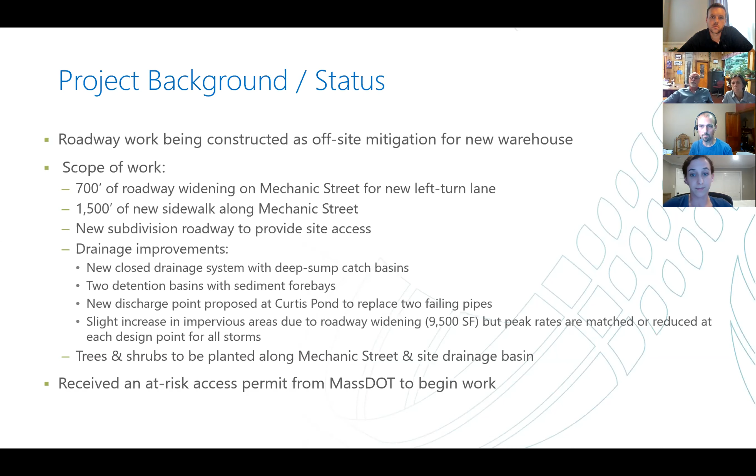And MassDOT did provide us with an at-risk access permit to begin construction. So the contractor is gearing up, but obviously we won't be doing anything within the buffer until we receive an order of conditions.

And at this point, I will bring up a plan view. Feel free to stop me at any point with questions. So this is a general overview of the project. This is the area of Mechanic Street that we're widening due to this left turn lane going into the access road to the warehouse.

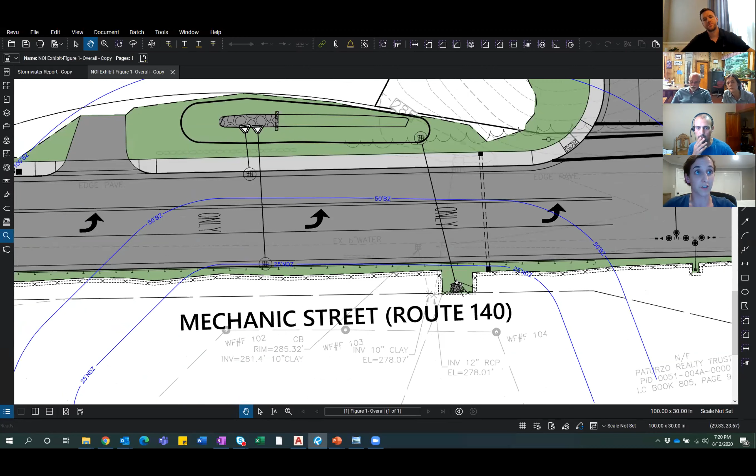The first drainage basin, detention basin that we're proposing is on the northwest corner of the intersection. We are proposing to pipe water from both the northern and southern sides of the roadway into this basin where it goes into the sediment forebay and then stays in here. And then there's another catch basin that goes across the street again to Curtis Pond. This is where we're proposing a new head wall and stone for pipe end.

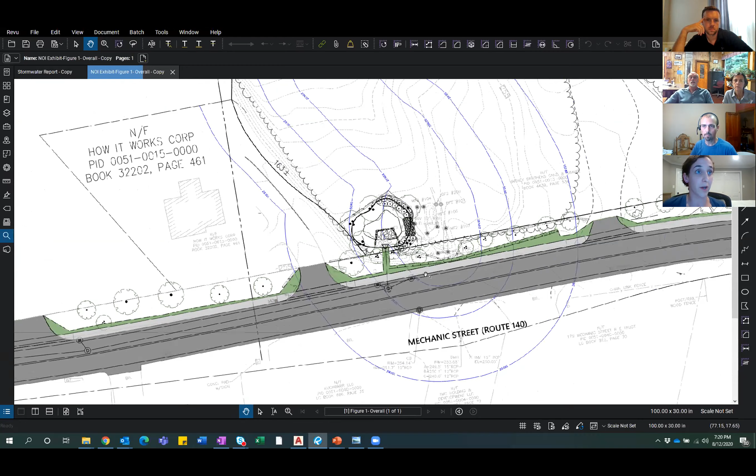And then on the eastern end of the project, well, past the intersection, you can see we're proposing a few new catch basins and a closed drainage system that go to the existing low point on the roadway. And we are proposing this detention basin with another sediment forebay, which then exits into the wetland. And you can see that there are shrubs proposed along the basin as well.

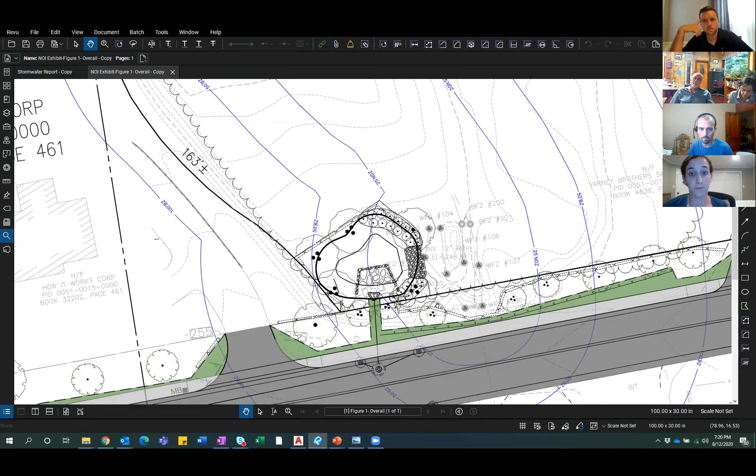I'll note that all of the proposed catch basins are deep sump structures, so we believe the design represents an improvement over the existing conditions, in which the water from the roadway goes largely untreated into the wetlands. And at that point, I will turn it over to Tori to go over our mitigation.

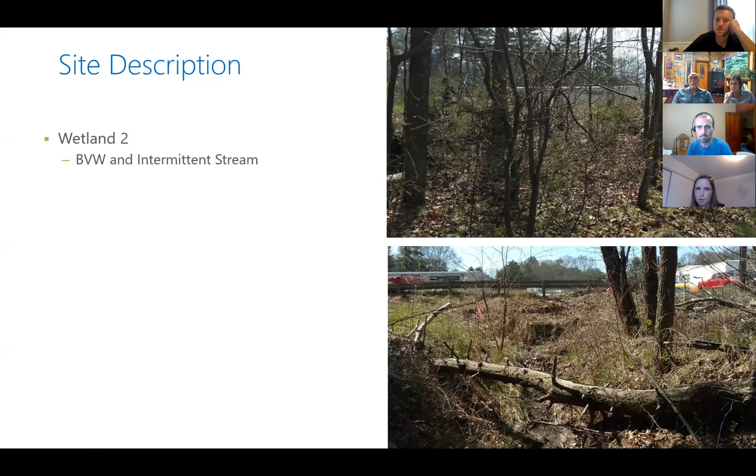I'm gonna go to the next slide. This is wetland 2 over in the eastern portion of the project. That bottom photo is showing the wetland looking towards the road. It's kind of a disturbed area. There's an outfall right there, and the wetland doesn't really start until a little bit lower down. You can kind of see a pink flag. And then the top photo is showing the area where the drainage basin will be. There are a few of the trees that we're going to have to remove as part of this project in that area.

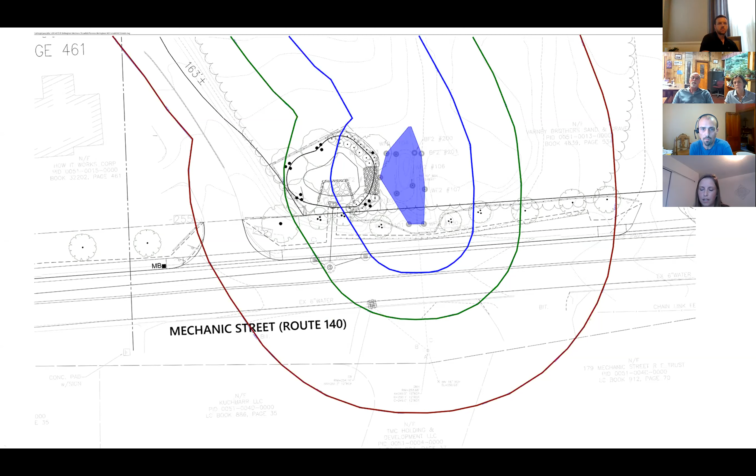Going on to the next one. This is wetland 2 again. Pretty small area in the project vicinity. There is an intermittent stream that starts up towards kind of the northern part, but it's generally BVW. And again, we have the buffers shown. This drainage basin is coming right up against the wetland. We did our best to locate it as far as we could away from it, but just given the constraints of the site, basically we think it's better to treat the water before it's going directly into that wetland, even though we're kind of coming up right against the wetland.

Going on to the next slide. So as part of this NOI, we're removing 25 trees and 105 shrubs. In addition to the typical erosion and sedimentation controls, including catch basin inlet protection for existing catch basins, erosion control barriers, and non-structural practices like sweeping and loam and seeding, we're also proposing buffer zone plantings. So we're proposing 34 new shade trees, 14 ornamental trees, and 110 new shrubs, which we'll replace on a 1-to-1 basis.

And with that, I will open it up to any questions from the commission.

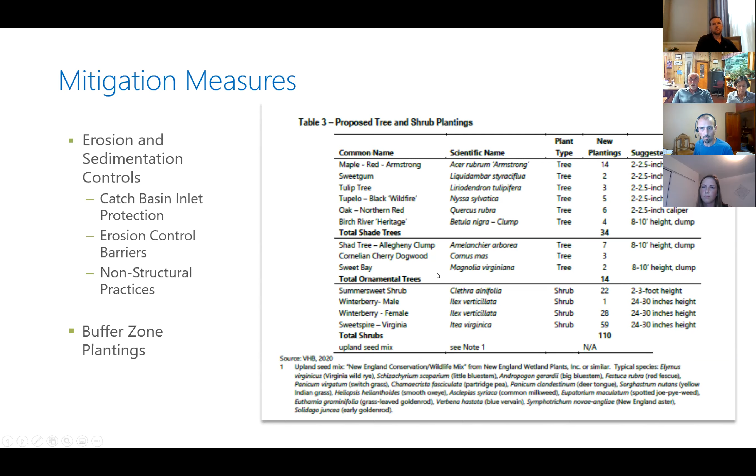Okay, so we have a situation where the drainage system going into Curtis Pond, which was essentially catch basin to a direct discharge, is not properly functioning. It doesn't appear that that's a huge catchment area. Do you know offhand? I guess this is a question for Margot. How big is that catchment area for that? Because it's not a very big structure.

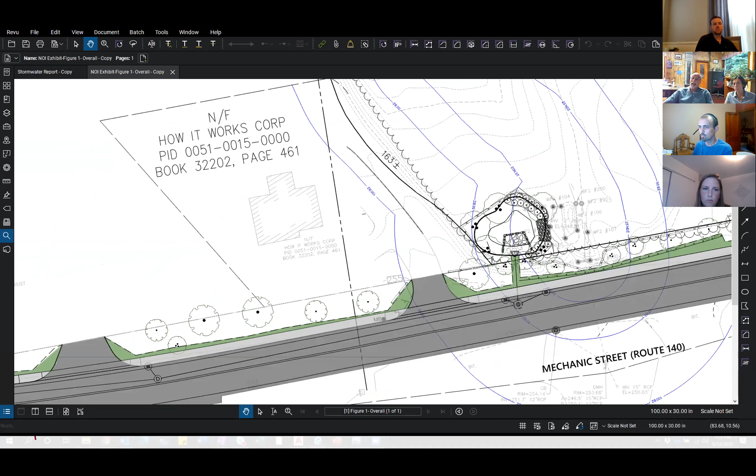Yeah, I know that there's a high point on the roadway a few hundred feet to the west of this, so it was a small area that we're now capturing by these two catch basins. Okay, you don't have that quantified though. I mean, it might be in the drainage calculations. Sure. I can try to dig that up. Okay, if you want to do that, then I can move on to another question.

Sure. Okay, between that and the improvements that you're making to the eastern basin, do you think that this meets the standards for the MS4? Which standards in particular are you concerned about? Well, we know that the town of Bellingham right now, we've had the MS4 audit and we're looking to improve to the maximum, well, actually not the maximum extent practicable. We have standards that we have to adhere to for treatment of stormwater. Has anyone on the VHB design team considered whether or not this meets the standards for the MS4?

Yeah, we've met them to the maximum extent practicable. The only one that is not fully met is the TSS removal, which we met as much as we can, considering we didn't want to have more impacts than necessary. Okay, and I know our DPW director isn't here, so I'm not sure how that would affect our overall evaluation, but everywhere we look, in every development that we're working on, we're trying to meet all of the applicable standards. So, yeah.

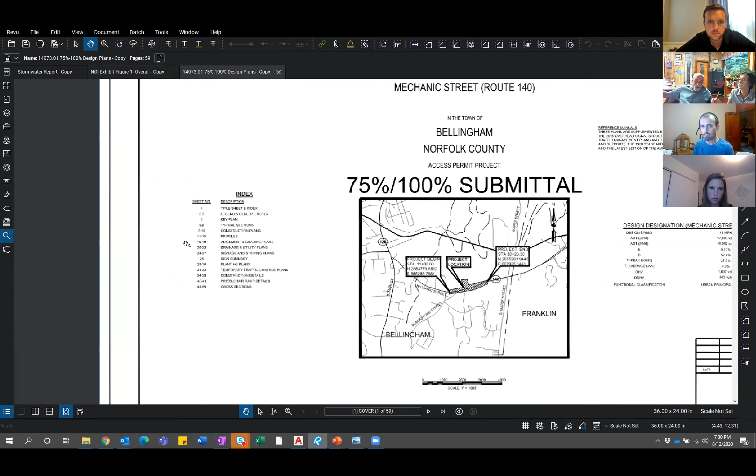Yeah, I don't recall it being 40 inches. That's huge. And it's at the base elevation of the basin. So you're going to be channeling an enormous amount of water into your infiltrators, and we need to make sure the infiltrators can accommodate that volume. Okay. I'm pulling up the plans now so we can check that pipe size. Certainly. Yeah, I have it as 40-foot long, 12-inch.

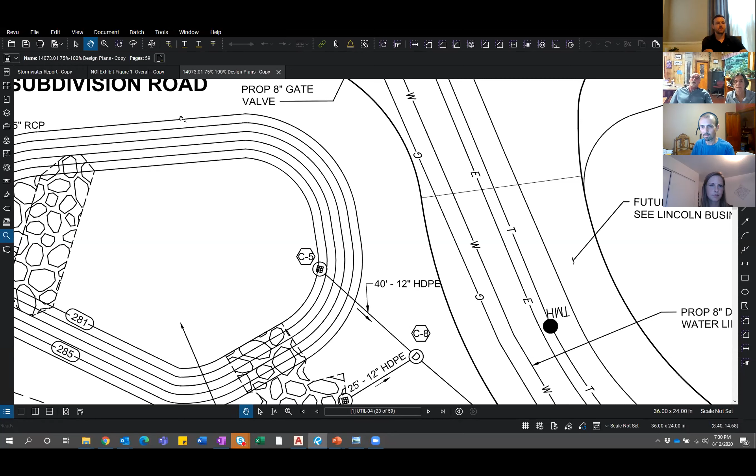I gotta tell you, when I'm reading plans on PDF files on my computer, it's a pain. My mistake. Okay, so it's 12-inch, not 40-inch. Okay, I'm a little bit more consoled. Great. Are you still concerned? I'm concerned because it's at the base elevation. So if you could just check to make sure that that volume was accommodated. Sure. Just answer that question. Absolutely.

Okay, next question is relatively simple. This work may require some excavation. I don't know how much fill is going to be required. Do you have designated stockpile areas?

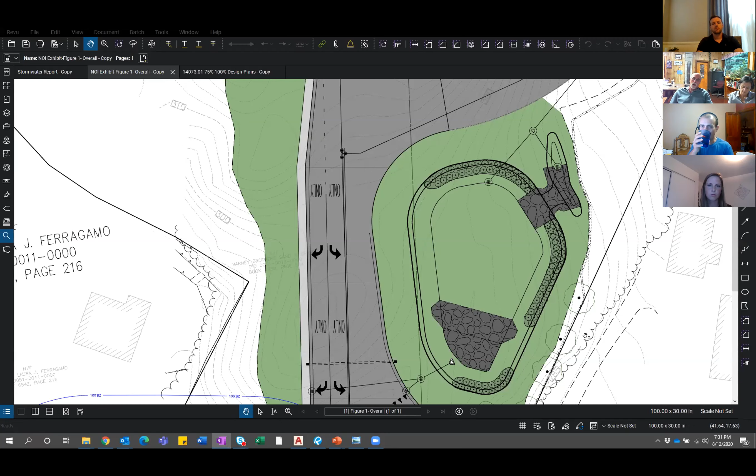Didn't see any on the plans. I imagine you're going to be using something on the Lincoln site if you need it. Yeah, perhaps. John, do you know if there's an area designated on the warehouse site? We certainly did not expect any to be within the state highway layout on Mechanic Street. Okay, well, that'll keep it out of the buffer zone.

Yeah. That's our concern. But what happens is, and I don't know what the stage of construction is now for that basin, but I want to make sure that we don't have a situation where we can have silt entering the basin, because now we have a situation where we have to excavate to approved base levels to make sure that we have the storage capacity that we permitted. Yep, understood. Okay. Let's see.

Question for Tori. Tori, to date, we have not received the DEP file number. And I know everybody's anxious to get this thing moving. Sorry, I'll let you finish. Go ahead. We did receive a file number this afternoon, right under the gun. And there were several comments on it, including on adding this subdivision parcel to the WPA form, which we have addressed, and we can provide you the new form. I can go back and look at what the other comments were, but we did receive a file number today.

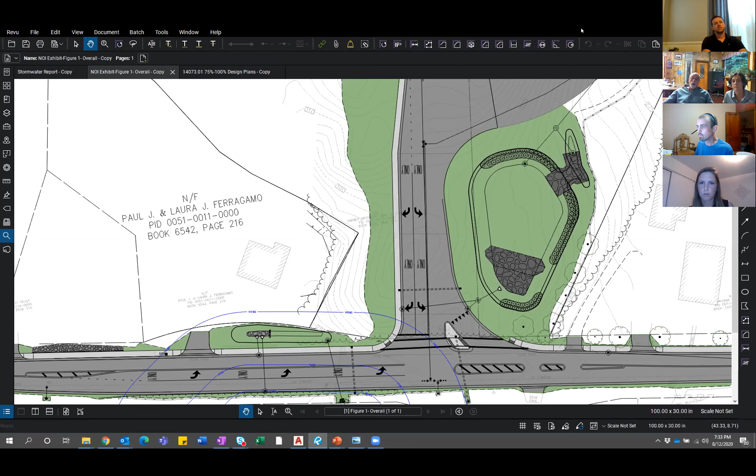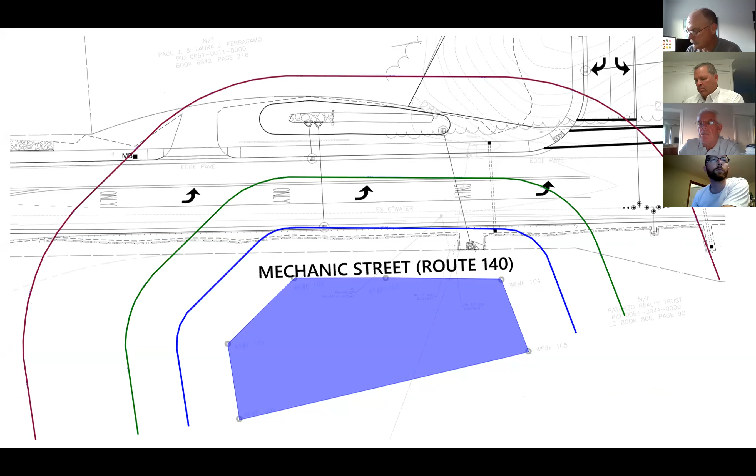Okay. Commission, do we have any questions? I have a couple. That would be Mike. Can you hear me? Yes, I can hear you. Okay, so if you could go back to the plan you just were at with the entrance and the green areas marked. Yep. And could you zoom in a little? There you go, the intersection. Right. Okay, good.

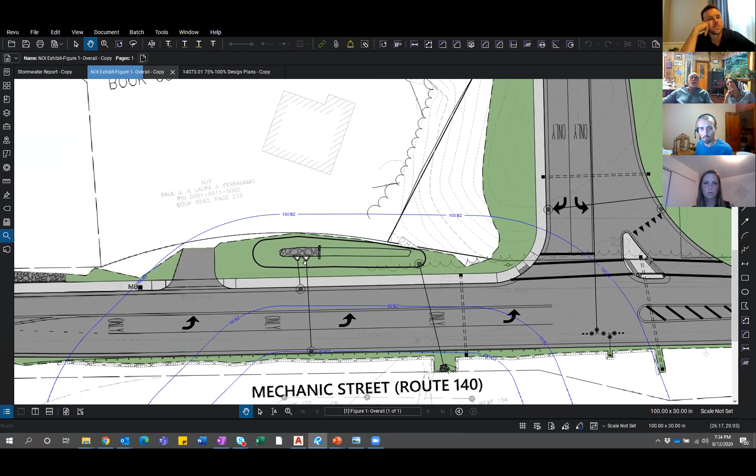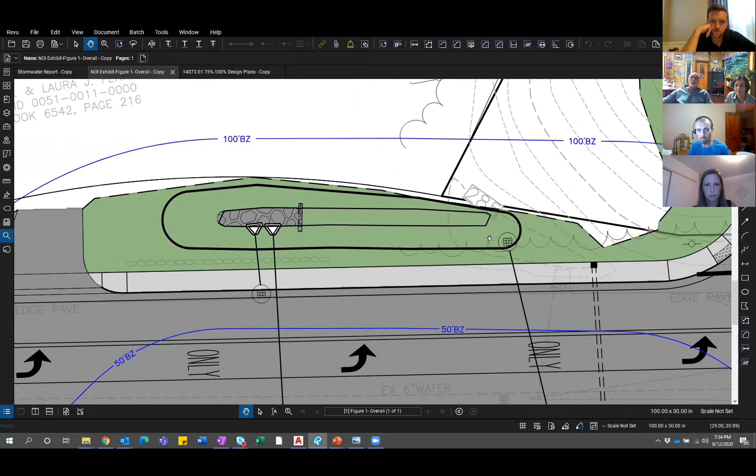So to the left of the entrance to the warehouse, the narrow oval shape, which is going to be a new detention basin, about on the right corner of that basin, there's a small mark. Is that showing an existing drainage catchment structure? Because there is one semi-buried in the ground right now in that area. No, to the left a little bit more. Right where your cursor was. On the left of your cursor, a little more. Yeah, right there. So is that showing an existing structure or a proposed one?

This is a proposed structure. I don't remember there being any existing structure here. What is the black object to your right on the mouse there, right at the edge of the proposed sidewalk? This? Yeah, is that an existing structure? No, we're installing traffic conduit. So there is a small one, small only because I think it's buried under debris, but it's in a very low area just past the entrance of the ramp. I bike by it all the time.

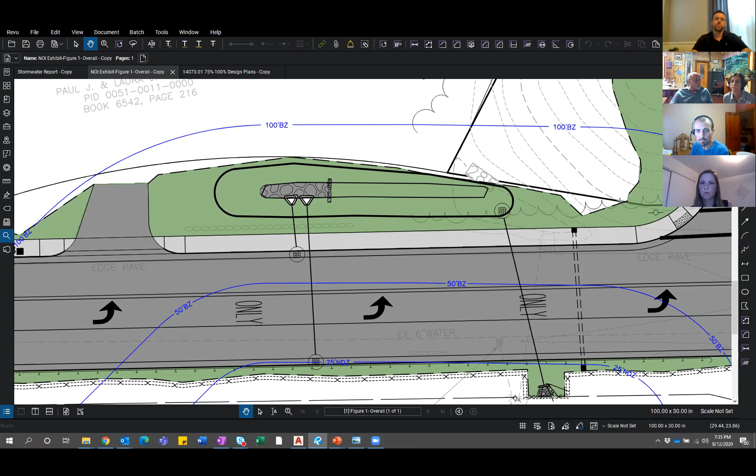I wondered whether that was going to be tied into, and if that was part of the old failing drainage into Curtis Pond. Right. So actually, now that I'm looking, this dashed line here is one of the outfall pipes. And even though it doesn't look like we're showing that structure, the pipe from that structure is one of the pipes that's being removed.

All right. So what is being done to treat this stuff that's going to go from this detention basin that's being created across the street into Curtis Pond? Oils and other runoff, salts and so forth. Yep, so both of these catch basins being proposed in the roadway will be deep sump. So we have some treatment there. Then once we get into the basin, we have this sediment forebay before the water overtops that and goes into the detention basin. All right.

So the elevation of the sidewalk to the bottom of the detention basin is what? So these are, let me see. I think this basin is 2 feet deep, but I can get you the exact grade difference. Okay, maybe I'd address it a little differently. From the sidewalk, if you're standing on this new sidewalk, right where your cursor is, you would be looking over and down into this detention basin, correct? Yeah. You're not changing the topography at all, really?

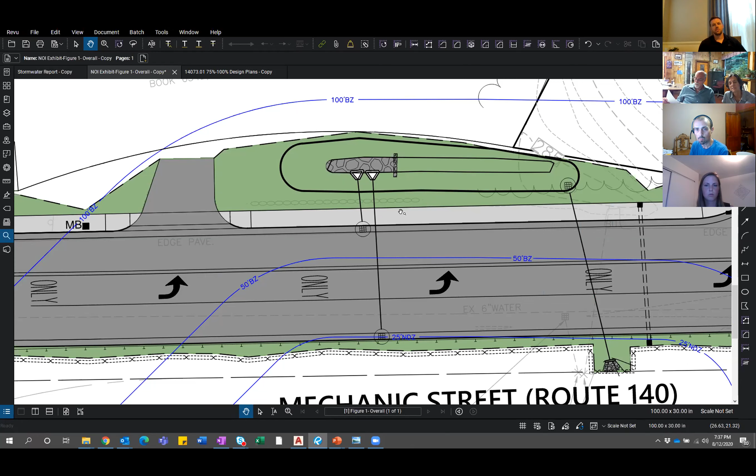Yes, correct. Okay. So what's to keep something from running closer to the entrance of the warehouse into the facility from the street and the sidewalk? Into that end of the basin where it's not going to be treated? Because the outflow is right there, correct? Across to Curtis Pond. Yes. Well, so currently, this will be a deep sump. Okay, I want to make sure that you were down at the other end of the basin. Yeah, any catch basins in the project area will be deep sump.

Okay. The length of the sidewalk at the beginning of the presentation was 1,500 feet of sidewalk. Is that a change from the original proposal for the project? Maybe Jim remembers better, but I thought it was 1,000 feet originally. I was wondering if they extended the sidewalk further down towards Bellingham or towards Franklin in either direction, because it was going to tie in at one end, but not at the other. It's not tying in at both ends, yeah. Sorry. It is, so it's going all the way up to the top of the next rise where the warehouse for the paper company is.

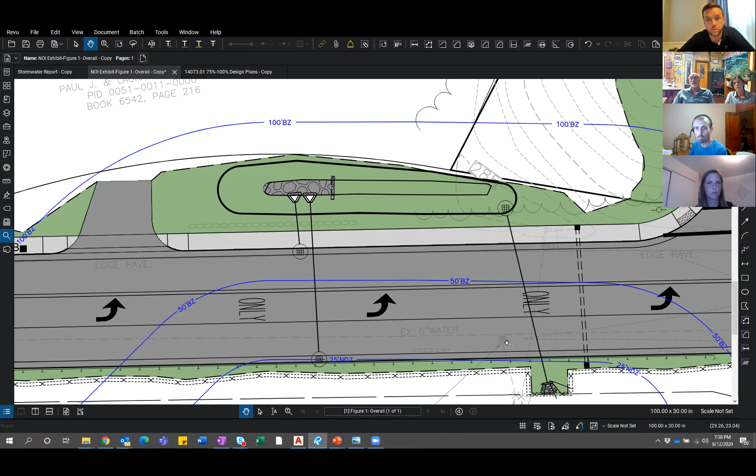So during the planning board process, the requirement was, correct, Mike, 1,000 feet to the Lindenmeyer Paper Company to unite with the existing sidewalk. My understanding, and Margot could talk, and Tori probably could talk more, but DOT is now requiring the extension going the other way. So where we're looking at now on the screen, towards Blackstone Street, to make that connection over there. So it's a really nice extension of sidewalk there. Yeah, that's good. It's tying in both ends.

The widening of the street right there by Curtis Pond, is it being taken from the, I'm gonna say the top, because I think that's northern, actually. I know the road runs east-west right at that spot, because I always bike into the sun at that point in time in the morning. So the top side of the street, is it being taken from that side? It's not going closer towards Curtis Pond in the widening, is it? Because you're right at the edge of the top of the slope there.

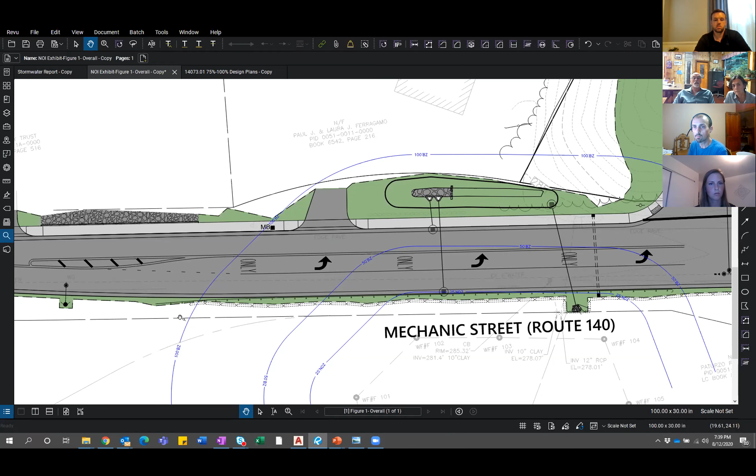Yeah, we are. Currently, we are splitting the difference. We went as far north as we could while keeping the limit of work off of private property. But what we ended up doing to avoid catching that slope down to Curtis Pond is we're proposing a type of guardrail that doesn't require a level landing behind it. So right after the curb, we begin our 2-to-1 slope down to existing ground. Okay, and it's going to be a regular curb to keep overflow from going down into Curtis Pond on that side of the road? 6-inch reveal. 6-inch, okay.

And one thing I wanted to point out, Mike, it's really interesting. We noticed this in the preliminary meeting in March. The layout of the road is really funky. If you look to the north, the black line just under the 100-foot buffer zone line, that's the right of way. Yeah, right there. That's the right of way. So we had the same concerns, but they expanded in the existing right of way without having to take private property. For the life of me, I don't understand why the right of way was expanded at that point, but there it is. That's the layout.

Uh-huh. So I'm just still trying to picture the eastbound side of the road there. So the existing guardrail has a little bit of level, like a few inches beyond the actual edge of the metal before it drops off. You're saying you're putting a different type of guardrail that basically doesn't need that. It sort of attaches to the curbing. The posts go much deeper, so the level area behind them isn't required to prevent the post from failing if a vehicle hits it.

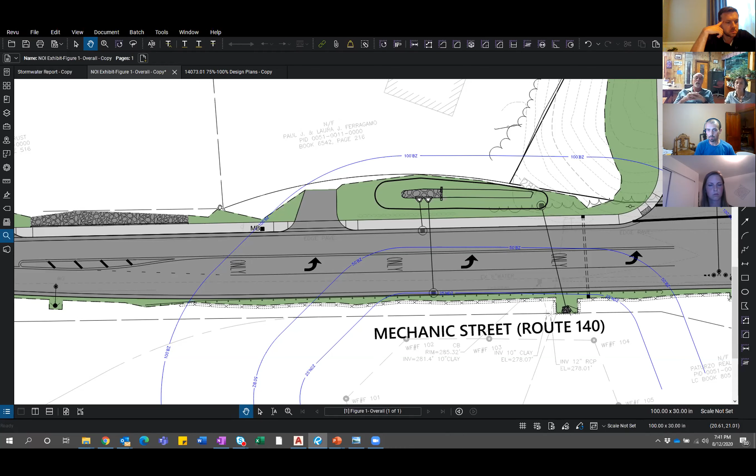So right at the, yeah. Go ahead. Good. Yeah. So what keeps the slope from eroding on the back side of the new curbing when you're now going right up to the very, very edge to, as you said, split the difference? I mean, we're using a 2-to-1 slope, which we always consider to be stable and non-erosive.

You're going to have to grade along the edge of that though, correct? You're going to disturb the area right at the top of the slope to do the railings and put the new posts in and everything else. My point is, what's to keep basically everything from sliding down into there? Are you putting stabilization materials on top of this afterwards? Because it doesn't seem like you have the room.

The existing slope you're concerned about? Yeah. So you're going to work on the top of the existing slope to do the new guardrails, to put the curbing in, et cetera. My concern is protecting Curtis Pond during the construction, and then what will stabilize the top of that very steep slope that has almost no lip now before it drops off to even less lip in the future, so that whatever hits that side of the top of the slope doesn't land in the road and get kept in by the curbing, but in fact is on the outside of the curbing.

Well, our intention is certainly for the contractor to not go beyond our erosion control. And I can show you some example cross sections. So we're actually able to tie in within the shelf next to the roadway, and we're not tying into the steep slope. So we did not believe that the contractor, aside from the new outfall, which will be stabilized, will be disturbing it.

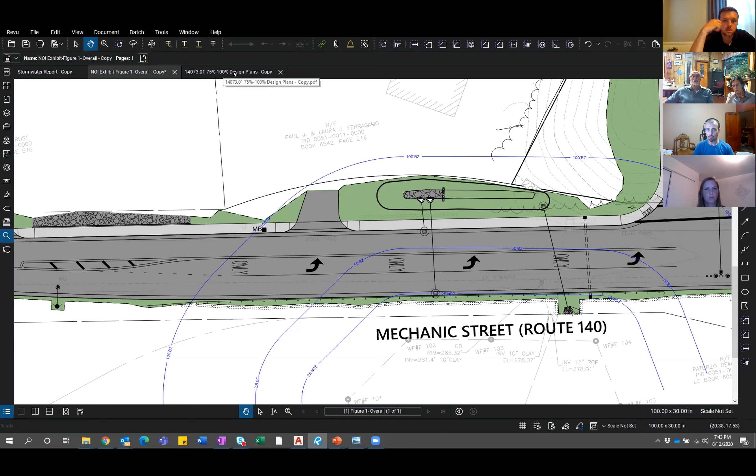Okay. How much was the road widened in that section compared to what the exact width is now? I think it's 22 feet now or something like that I saw. Yeah. I'm going to pull up the plan so we can get a better idea. We have to move along. I have one more question after this.

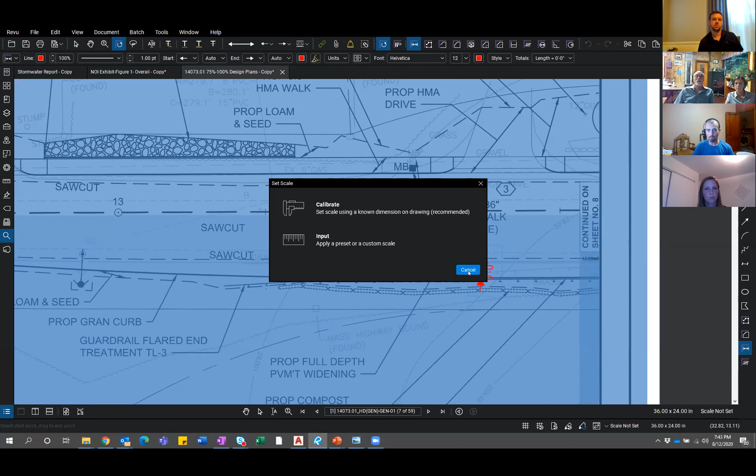Let me see. So that's 20 feet. It looks like it's a little bit more than 5 feet. On one lane or 5 feet overall? In both directions. You need 5 feet on each side of the middle of the road. So 10 feet, 10 and a half feet total? Yep. Okay. I mean, we're adding another travel lane, so. Yeah.

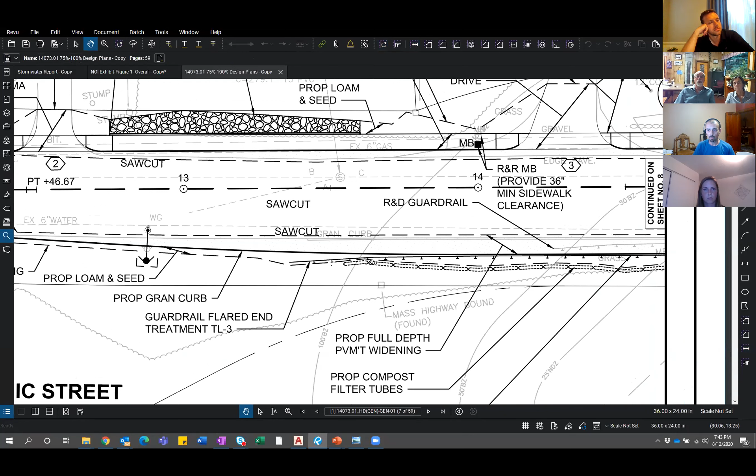Okay. One last question. I know we're going to move along. The entrance, the detention basin, detention, not infiltration basin, correct? The right of the entrance, that's not looking for any infiltration, correct? Because it looks like they blasted into a bowl of stone as I go by it. I haven't gone down and walked around in it, but not that one, the other one to the right. This. Yeah, that area there is all stone right now. And again, I haven't walked around.

You're not proposing any infiltration through that. I raised that during our initial hearing. It looked like they're going to blast down into the stone. I said, well, how are you going to be sure you're going to be able to infiltrate anything? I thought they were talking about taking infiltration in that area. Is that still proposed? No, we're not counting infiltration in this basin. And we certainly have gotten the feedback from the contractors on site that it is all ledge. And we've tailored the plantings around it with that in mind.

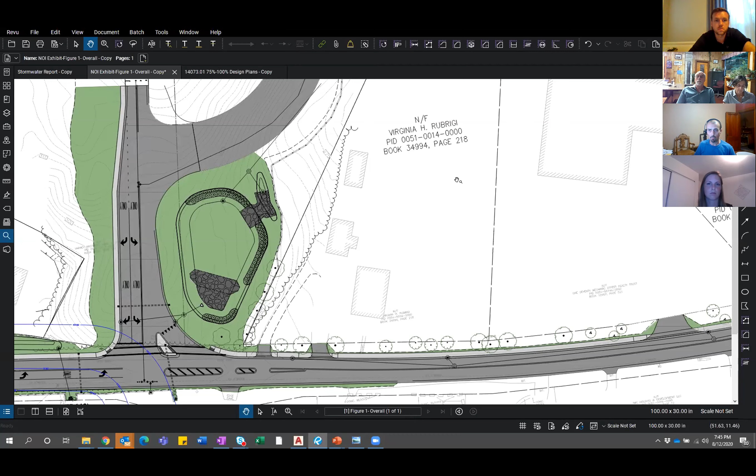Okay, so yeah, that area there is all just flattened, and I think Jim mentioned this at the last meeting, that's not part of the Lincoln project? That's some other project? That's correct. Okay, all right, because I was going to make sure of what we're planning on doing. So landscaping isn't going to go over into that area at all? Correct. Okay, all right, that answers my questions, thank you.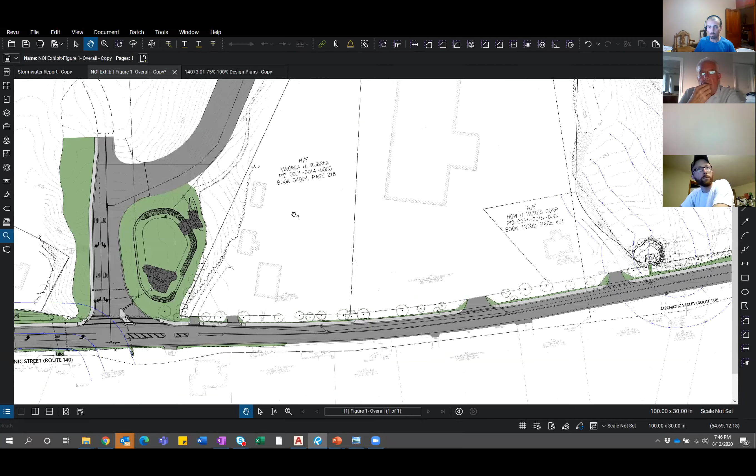Mr. Chairman, I'd like to ask a question about the other basin. Certainly. Could we move up to the other basin? The one to the east. There you go. Thank you. I just have a question about the siting on that. Why it couldn't have been located a little bit further from the wetland, possibly elongated to the northwest a little bit.

Yeah, I can take a crack at that. The real reason that we did that is because siting it where it is located on the plans has sort of the least impact to the existing vegetation that's there. We did look around at alternative sites. We actually looked to the east of the wetland, basically on the other side of the wetland. We looked at expanding to the northwest, and the area where we are locating it now really has the minimum disturbance to the existing trees and other vegetation. It's pretty sparsely vegetated in that spot. But if you move it in any direction, you end up impacting more vegetation. So it ended up being the most.

And we thought also, I know this commission doesn't like to use the word degraded for wetlands, but the wetland that it is adjacent to is a compromised wetland. It's got a lot of scour. It doesn't really have a lot of size to it or other wildlife habitat values. So we wanted to get something that was going to expand that area as a naturalized area and make it a little bit larger and more comprehensive. So it seemed to actually serve a little bit of a dual purpose there.

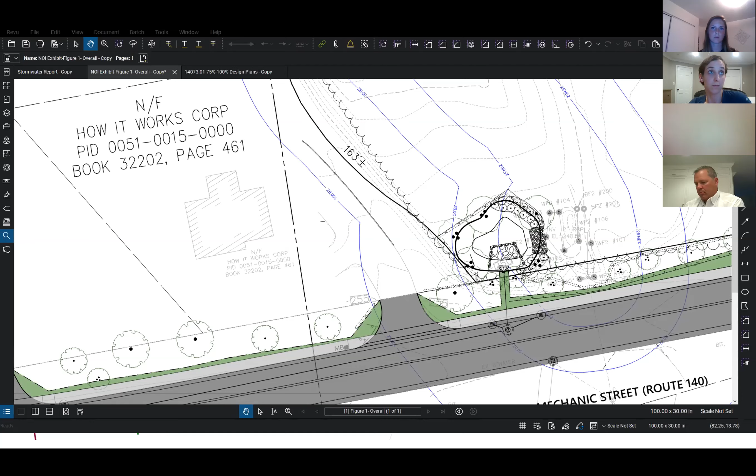With all that said, and all the great things that have happened on this project to date, my question is, would we be held up from actually going out there and starting to mobilize and do some construction over the next couple weeks before we finish up on the 26th? I think Margot had suggested something earlier in the hearing process. Now, remember, we had a motion and a second. This is part of discussion, so I'll allow it. What Margot was talking about was work that's outside the buffer zone. I think that's not regulated, so that's permissible.

What's the board thinking here? Yeah, I'm sorry that I didn't get in there. I was raising my hand a couple times, but I guess it wasn't working correctly, and then I finally got in. I was trying to make a comment earlier.

Okay. Well, again, I don't feel that having the order prepared for possible approval and signature at the next meeting will delay this at all, not one minute. That's kind of the standard that we follow, regardless. The time frame for doing it this way or the other way is exactly the same. Correct, Mr. Chairman? I think the applicant's suggesting that they're ready to mobilize shortly. No, I get that, but we couldn't possibly have the order signed before the next meeting anyway.

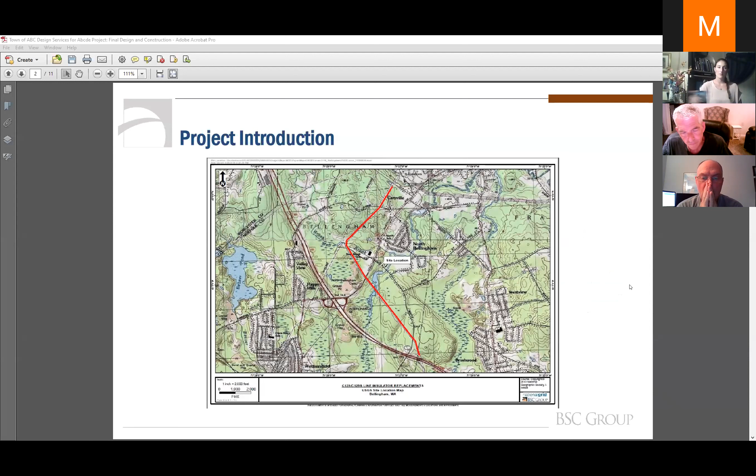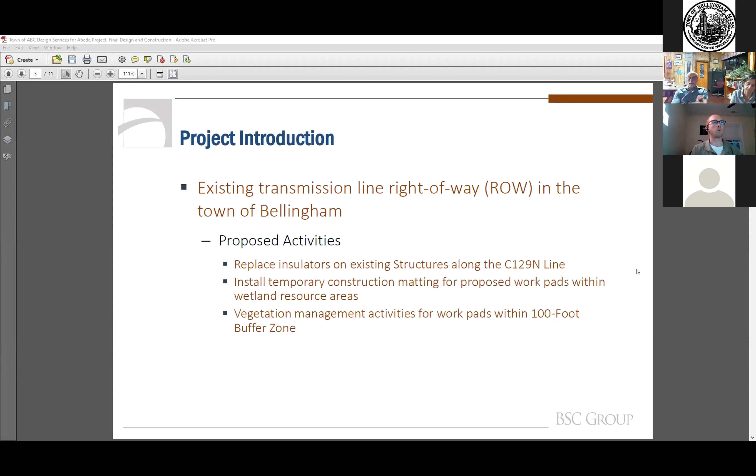So as I said, New England Power is proposing to do an insulator replacement project on the existing C129N line. In terms of location, exactly right. We're going to go from Maple Street to Stone Street in Bellingham. Here's the USGS map as reference. In terms of project introduction and scope of work, within the proposed activities, the replaced structures will be on the existing structural transmission line of the C129N line, install temporary construction matting for proposed work pads within wetland resource areas, and then also vegetation management activities within the 100-foot buffer zone.

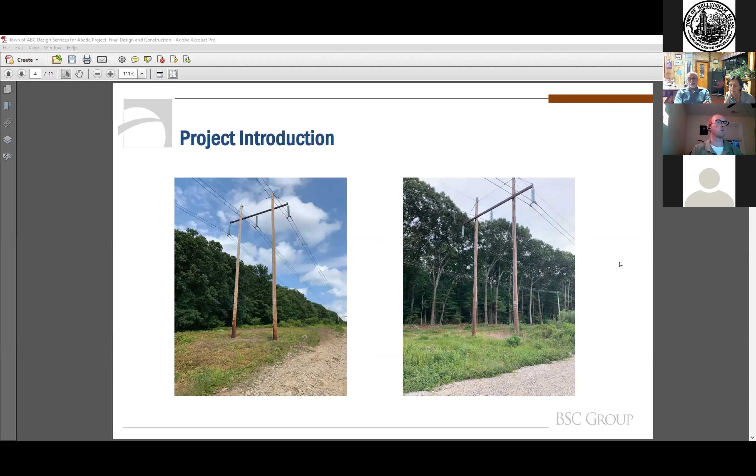Here's some pictures of areas where they have done some work previously in other towns. To the left here, we show a small mowed pad within a buffer zone. The insulator replacement overhead work is shown up here. They're basically just going in, replacing these insulators. It takes about 2 to 4 hours per structure, and then they move on to the next. And then here's one that's also been completed. Very minimal ground disturbance in areas of buffer zone and upland work. The areas where the structures do exist in wetlands, that's where we propose the matting, which I can go into shortly here.

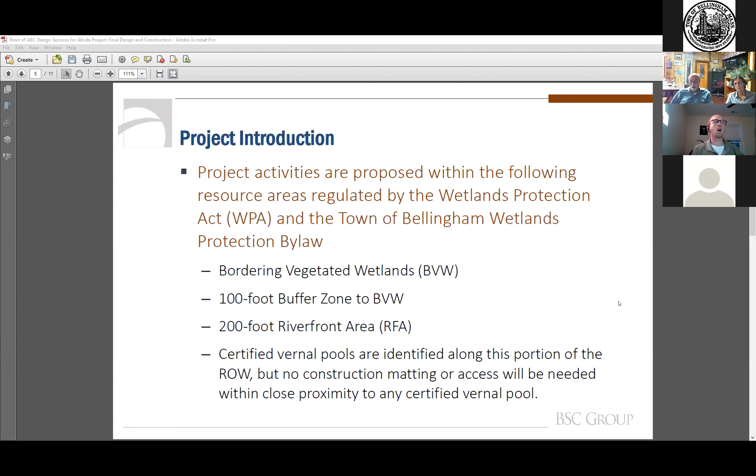So as I said, project activities are proposed within the following resource areas of the Wetlands Protection Act and the Town of Bellingham Wetlands Protection Bylaw. The resources are the bordering vegetated wetland and the 100-foot buffer zone. We have a small section of 200-foot riverfront area. There are some certified vernal pools identified in this portion of the transmission line, although no work is proposed within or close proximity of these. All the access roads have been approved for a previous project that still has an open order of conditions, and all those will be used for this project.

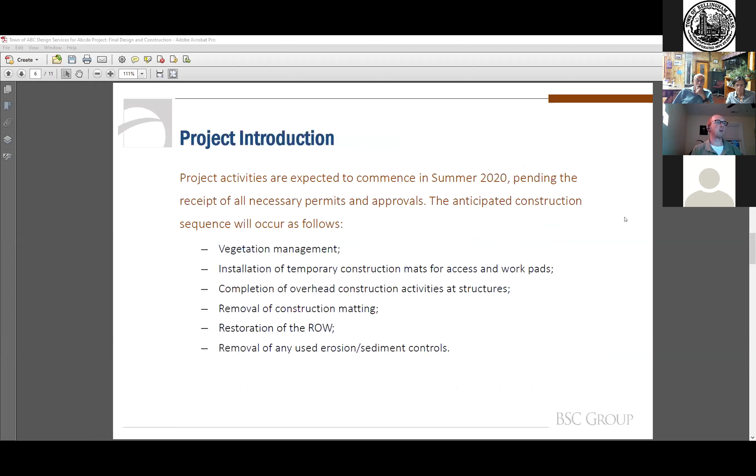They would like to start within a couple weeks here, so summer of 2020. Basically, they're going to do some vegetation management in the 100-foot buffer zone areas, install the construction mats for the access and work pads, complete the overhead construction, remove the matting, and then do any restoration or removal of any erosion controls that are needed. This is overhead maintenance work, which is exempt under the Wetlands Protection Act. However, we are filing this RDA for the matting within the wetland resource areas per the town wetland protection bylaw.

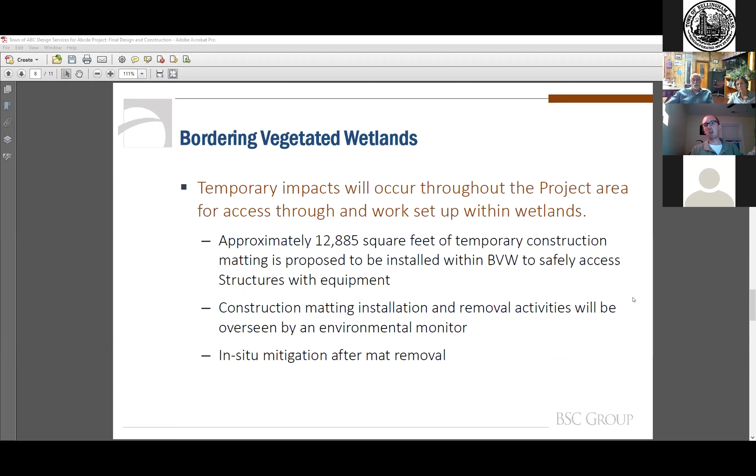In terms of temporary impacts, throughout the project we have approximately 12,885 square feet of temporary construction matting proposed within BVW. I had briefly coordinated with Ann already about installing and removing these construction mats with an on-site environmental monitor, and then in-situ mitigation after mat removal. This work is under the ACO, and per the ACO through DEP, we will be monitoring the restoration and vegetation regrowth after the matting is removed.

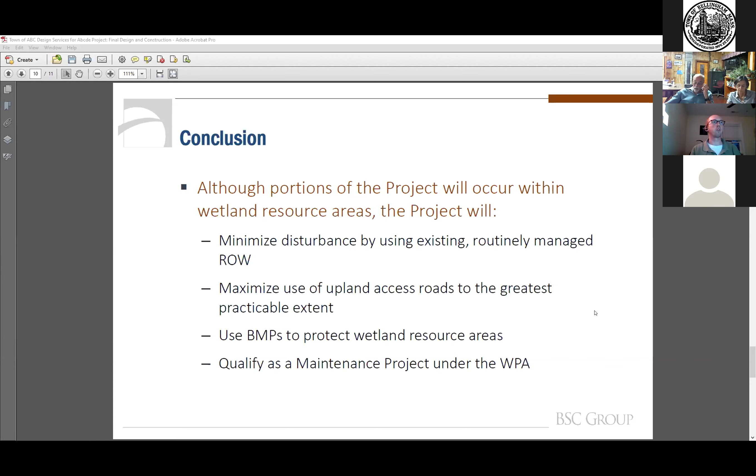And then some best management practices: sediment and erosion controls, stabilization, construction accesses, and work paths. Any refueling and maintenance will be conducted outside any resource areas. Mowing and invasive species management, making sure that invasive species are not spreading, and also the construction matting. So in conclusion, we have very minimal disturbance anticipated for this project. The access routes will maximize upland and existing access routes. The use of BMPs, and again, this qualifies as just an overhead maintenance project. No ground disturbance for this work. I'm happy to answer any questions. I can also go through the plans if that would help.

Real quick, what time of year were you proposing to do this work? So it's going to be this summer. It's probably going to be as soon as we have the RDA, the negative determination. If that goes through, then within probably the next couple weeks. That's high summer. I don't suppose there's any way we could delay a little bit until such time as we didn't have full leaf out. It's dry though. It's dry. Yeah, it is dry, and I know for some of this work they will need outages, so that will also determine the schedule a little bit as well. Well, it's not like we need power at this time of year.

I mean, summer of 2020, you realize summer's almost over, right? Yeah, so like I said, it's gonna be within a couple weeks. Okay. Seems kind of last minute. Well, I guess some work has taken place.

I guess the question, I mean, it's a rhetorical question, but you know, when you're replacing structures, wouldn't you be doing the maintenance to the insulators at the same time? Just seems a little duplicitous. We have a different union. Oh, okay.

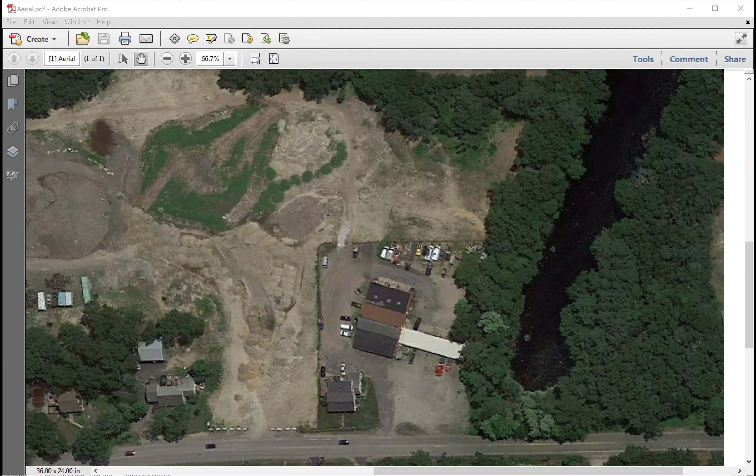Ouch. Point for Jim. Boy, I like Jim. He tells it how it is. That's it.

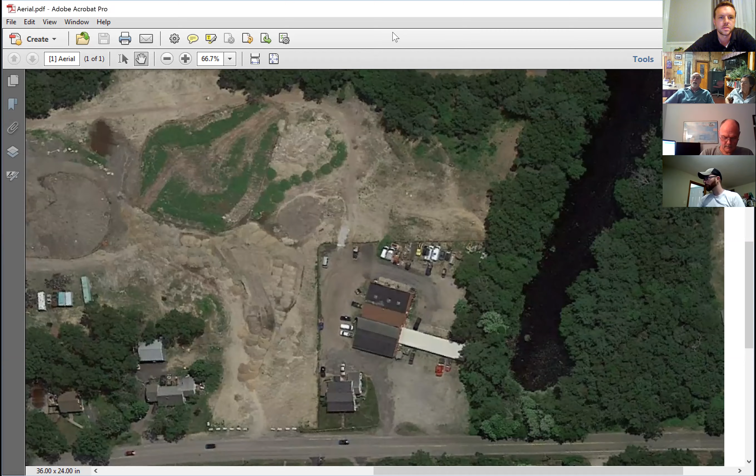All right, let me go back to the Zoom. So you're still looking at this. Do I? We have the orthophotography. Yeah, I'm trying to see how I would pick another PDF. I apologize for that. Is it open already on your screen? It is, yeah. That's why I just went in and tried to select it. Well, you might need to unshare and then open it back up, share again. It'll give you a full array perhaps. All right, why don't I do that?

That's why my wife calls me Mr. Pencil. I'm not good with this type of stuff here. I didn't get a cell phone until about 5 years ago.

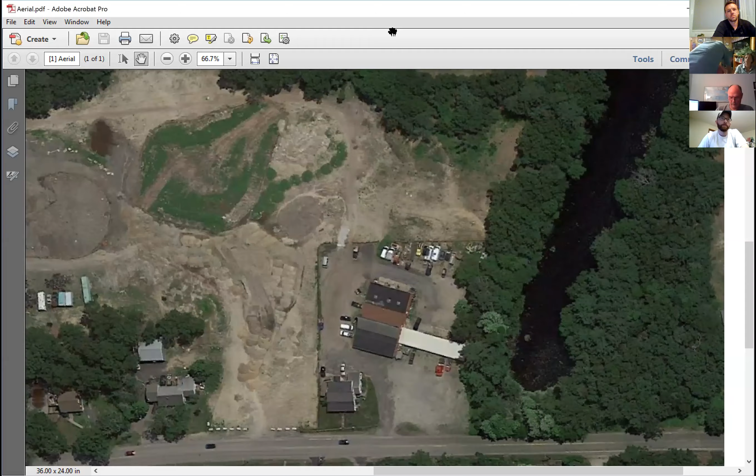All right, I'm gonna do this again. Sure. Why don't we do, all right, yeah, that'll work better. How's that? Oh, much better. Much better. Okay, thank you. Thank you for bearing with me.

So we are across the street coming in. I've got a hard turn for our site to come in because we are sensitive to the wetland resource area with Curtis Pond here on the side. So as part of our design, we had to do a very dramatic turn, but still staying with standard design guidelines to come into the site and minimize our disturbance, even within prior disturbed areas, to try to really mitigate that. But then we do come back towards the 100-foot buffer in this area where we have some parking, covered parking garages, and some parking spaces right here as well.

We are going to be modifying this slightly to let you know. So we did go through a ZBA hearing, actually 2 of them, and had several meetings with abutters where there was concern about how close we were in proximity to them. It's going to require us to push this covered parking down a little bit and get rid of these 3 parking spaces. So that will push us into the buffer a little bit more with that covered parking. However, we're basically swapping out impervious area for parking with a covered structure, which is better from a stormwater control standpoint. So I'm gonna do this the way we just did it last time.

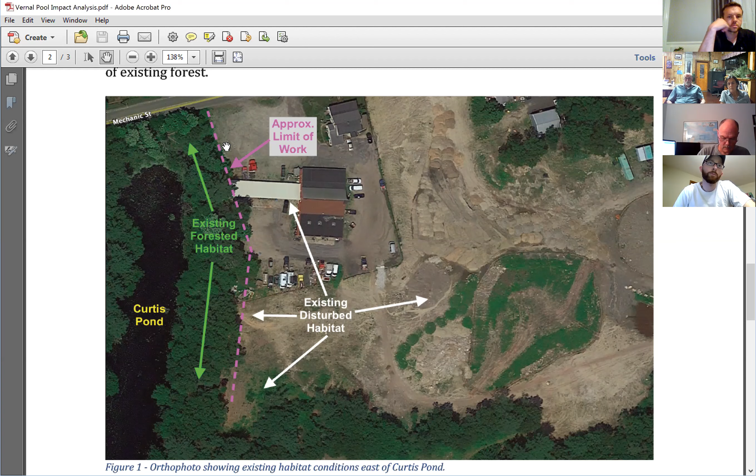What we did want to make sure that we highlighted, it was stated by both that existing forested habitat was valuable, especially for the spring peepers, to maintain it as much as possible. So that's where we held the limit of work. We're not going beyond that. We do have to go into the 25-foot buffer slightly near the entrance for that access in. However, that is not an existing forested area. It's just an existing disturbed area that happens to be within the 25-foot no disturb. And then we'll certainly restore that back. So I did want to just show you that again.

And then I think it's worth showing you a big component that we worked hard on, the stormwater design. This has got a lot of colors to it, but what I want to show you is if you can follow the pink outline, this is the subcatchment area, P4.0. This is the area that contributes towards Curtis Pond. Everything else, we were careful to design the grading and the drainage in such a way that everything is now traveling away from Curtis Pond.

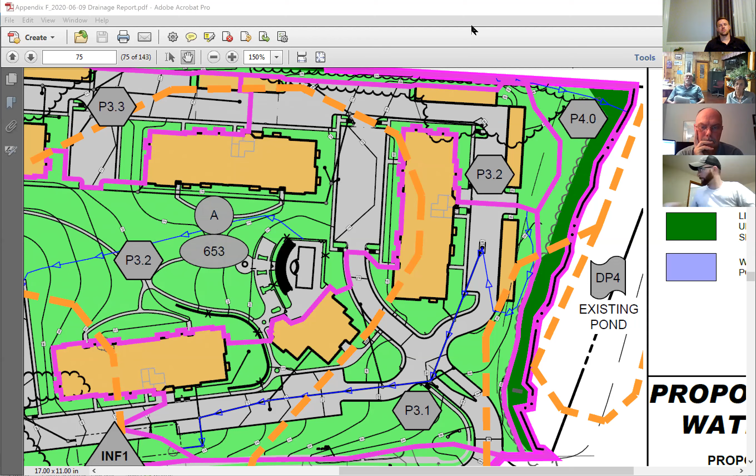So all the impervious surface that's within the 100-foot buffer zone is actually directed away from Curtis Pond and goes into our stormwater mitigation that is easterly away from that. So the only subcatchment contributing to Curtis Pond after the project will be a restored area that will have vegetation throughout. We'll have the existing forested area and then a restored area up in this region. So we think that was important just to give you an idea of the improvement that we're going to make to the stormwater flow towards Curtis Pond.

We are proposing 15 trees within the buffer zone, a mix of oaks and ornamentals. And we do have obviously revegetation that's going to be going on, especially up in this region, all through here, that's going to be untouched. And that's most of the highlights of it.

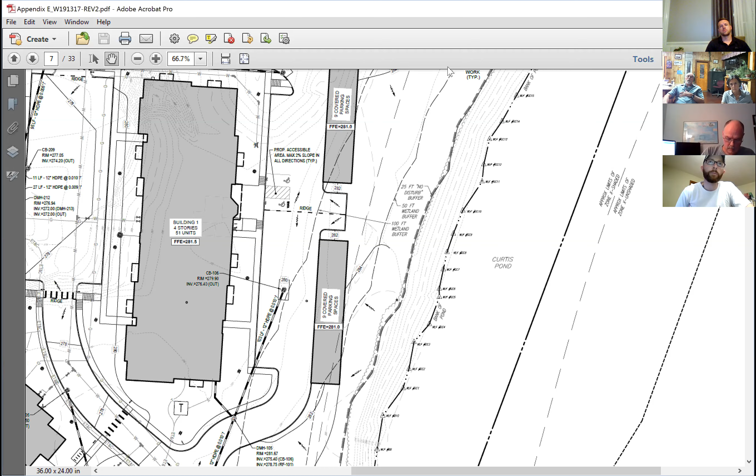I do want to point out, we do have a small area that is impervious right here within the 0 to 50 foot. It's about 70, 75 square feet, but it's covered roof area that's directed away. And the existing impervious area within the 50-foot buffer is approximately 700 square feet. So a significant improvement in that regard as well. And I can put up anything else you guys might want to review that I've shown you so far. So the existing structures are going to be removed.

I think what we need to do is we need to take a walk. I'd like the commission to see this. We'll pay special attention to the break point in the edge of the forested area. I'd like to also point out that in the BSC peer review, they noted that with the presence of the facultative species that were discovered in their site inspection, they felt that it might be certifiable if Curtis Pond dries up. Now, I've witnessed Curtis Pond dry up numerous times over the years.

What we normally do, just so that we can highlight resource areas, is that we request applicants, if it's appropriate, to go through the certification process for us. Is it something you might be willing to do? It's not going to affect your project because, as you probably are aware, under state certification, there is no extended buffer zone. It's just to the edge of the resource area, but we like to have accurate mapping of those resource areas in our town.

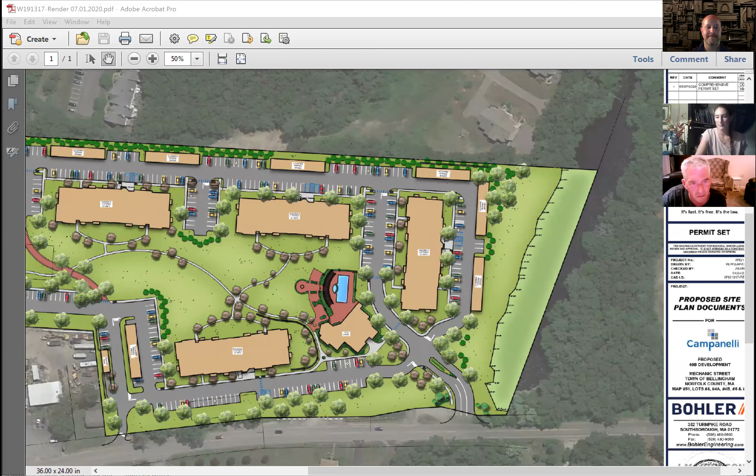Thank you. All right. Thank you very much. And thanks for having patience with me. I appreciate that. Well, thanks for your forbearance because we're a little behind schedule, but we're getting back there. Good night, everybody. Thank you, Jesse. Thanks, Matt. Good to see you. Good night. Okay.

I see Mark and Sean are here. Just give me a second to put away some of this paperwork that's burying me. This is for.

Do you have the hearing? Yes, I have. You got it? No, but I'm going to dispense with the reading of the advertisement. Here we go. These are the new things. Okay. Okay.

This is an application where we've had several hearings open in the past. That being the case, we have established a track record on this project, so I'm going to dispense with the reading of the full advertisement and open the continuation for the roadway stormwater management system, filling of isolated vegetated wetlands for the subdivision and lot construction at Bellingham Shores.

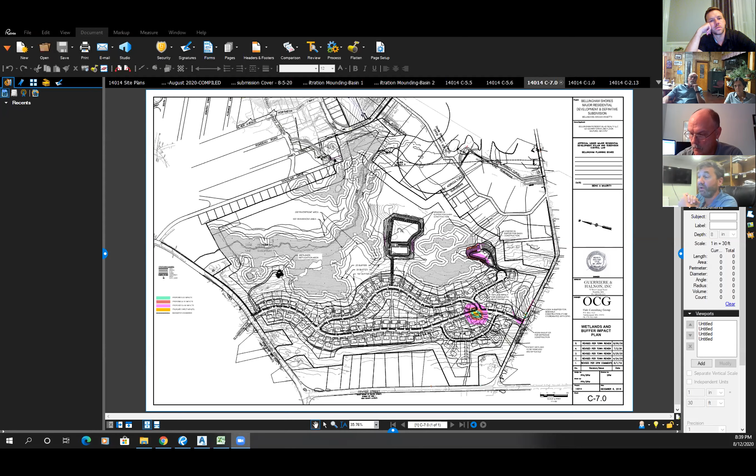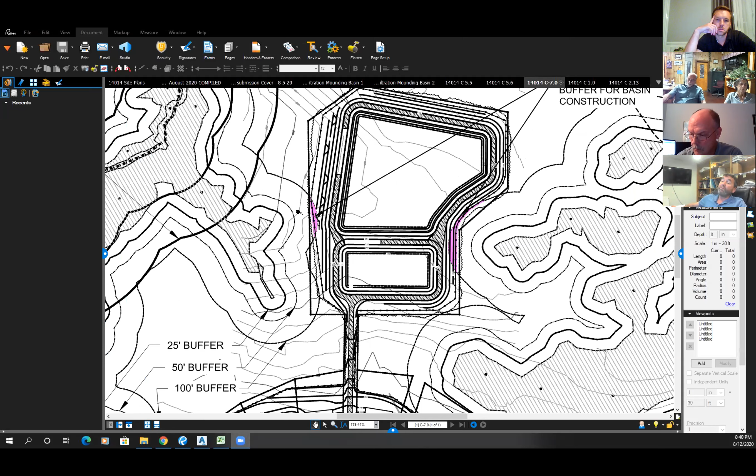So what I'm showing on this plan is the updated impact plan. And as you can see, we have kind of brought in that Basin 1, made it tighter and a little bit longer, more towards the east. And in doing so, we're able to lessen the amount of buffer impacts. Previously, we actually had grading into the 50-foot buffer in some portions of this, so we've been able to eliminate that, and we just have a little bit of perimeter grading just on the bottoms of the slopes down here.

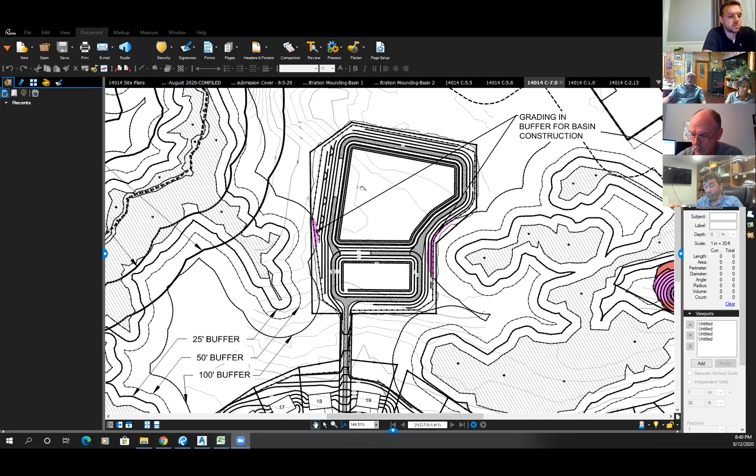We've also been able to reduce the amount of fill going down into this sloped area into the wetlands by bringing the basin, as I was saying, more towards the east here. So we're utilizing this flattish area as much as we can. The revised stormwater calcs show that this still works, and we're still decreasing the rate and volume of runoff from our site.

We've also, as part of this, did a mounding analysis for this basin and Basin 2 as well. And what that analysis showed is that the groundwater mound associated with the infiltration of these basins would be limited to within the perimeter of the basin. We wouldn't be extending a mound beyond this area that would adversely affect any abutters or anything like that.

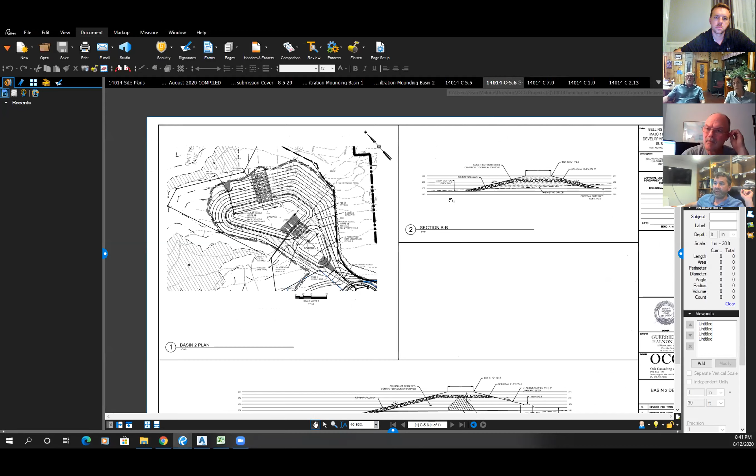And just to note, the amount of water that's impounded in these basins depth-wise is relatively low. The outflow for Basin 1 is 2 feet off the basin bottom. So there's only 2 feet of impounded water there before you overflow. And likewise in Basin 2, it's only a foot. So there's not a lot of impounded water there.

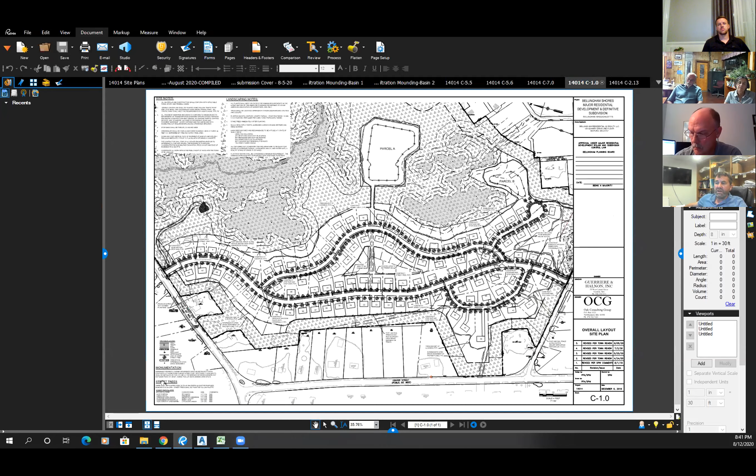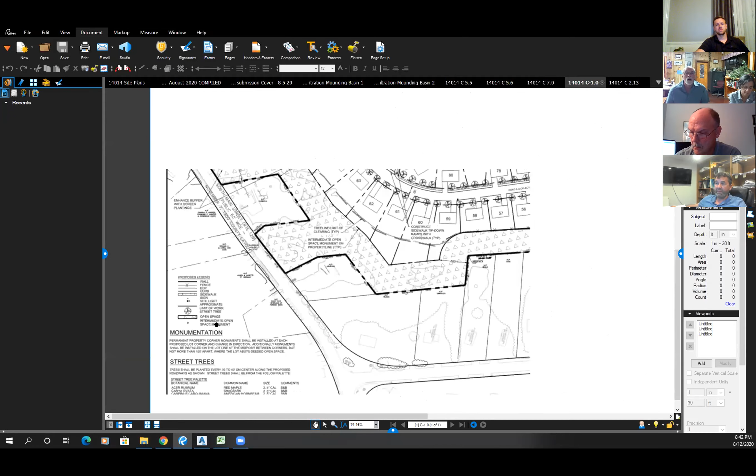We also made some note changes regarding the open space and monumentation that we had talked about. We've added or clarified this note to indicate that we'll have monuments at the lot corners as well as the midpoint on any lots that are adjacent to the open space, and at the midpoint, but not more than 100 feet apart. So if it's more than a 200-foot long rear line, we'd have 2 monuments there.

I also received from Jim the plan for the municipal basin behind Douglas Drive. So we've updated our open space plan to, one, account for the adjusted grading and lot changes associated with the Basin 1 changes, but also indicate this area here that would accommodate the basin that the town is planning on putting in as a separate deeded parcel, which would be deeded to the town, versus the remaining open space, which has been noted to be deeded to the Conservation Commission.

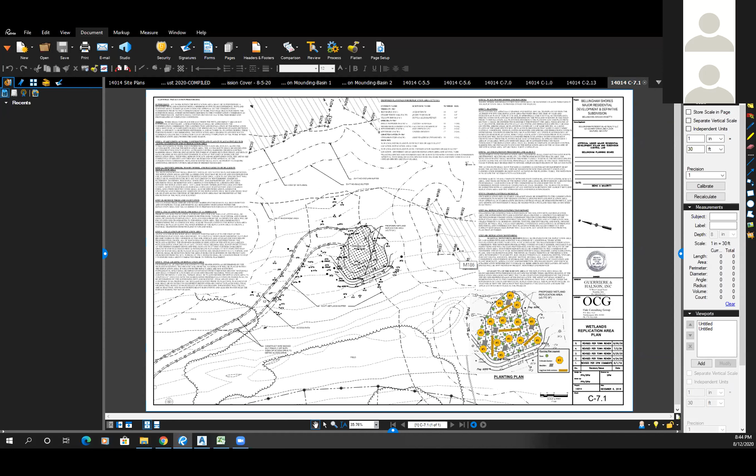I think that pretty much sums up everything that we had talked about with respect to the Conservation Commission's questions. And at this point, I guess I'd turn it back over to you, Mr. Chairman. Sean, just to add to that, we did also in the buffer zone plan account for the potential sidewalk along Cross Street. So you'll notice that those impacts are shown on the buffer zone impact plan, and the replication plan has been amended to account for replicating the area that would be impacted at the outlet of the stormwater that is along that proposed sidewalk. So that's all been incorporated in the plans, and they've been updated to reflect those required replication

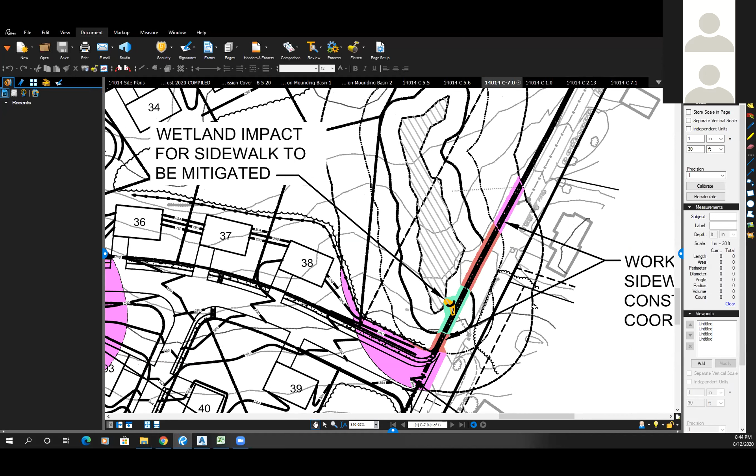numbers. And again, the sidewalk is something that the planning board is requesting that the applicant at least have laid out and prepared for, and the commission wanted us to make sure that we had those impacts evaluated, because although it may not be built at the same time as this project, it is probably going to be tied to this project in some form in the future. Good. That's a strategy I think that we talked about in the field, and it's appropriate. Good. Okay.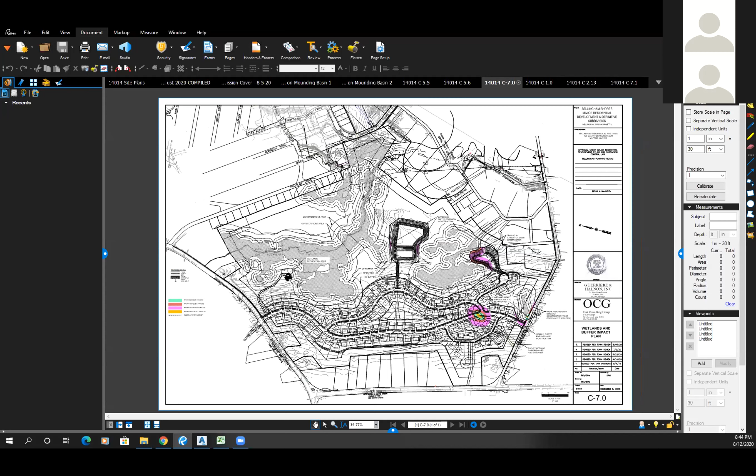So as always, I got a couple of notes here. I'd like to start with your mounding analysis. Yes. And I got it on an 11 by 17, and it was very difficult to read the numbers in the red. Do you have that, Sean? Do you have that mounding analysis available? Yes, hang on one second. Okay. Let's get that. There you go. Here. Okay. Yeah, I had a little trouble with the red.

Now, I don't pretend to be an engineer, but what I have seen for mounding analysis in the past is that the vertical scale refers to separation between the basin bottom and groundwater, and the horizontal scale usually reflects time of concentration. And so I've never seen this kind of a calculation. Now, we did speak with our peer reviewer and asked that he explain it to me. Now, maybe you can do that. It's just a little unusual.

You plug values in, your input values, and they're explained, but I'm not sure exactly where you got them from, and I don't want to get into the minutia of the engineering that's associated with it. But we did ask our peer reviewer to take a peek at that. But maybe if you could just explain the vertical values versus the horizontal values, so we can see. Normally, what we're looking at is not so much the volumetric area, but rather the effect on groundwater that the recharge might have during a prolonged storm event.

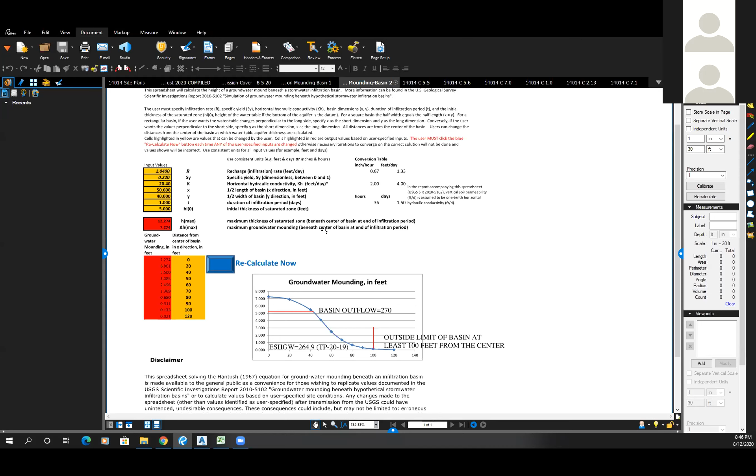Mm-hmm. Sure. Okay. And let me look at this one. This might be a little easier to start with. So this is a spreadsheet published by the USGS. It's based on what's called the Hantush method. It's fairly standard in analyzing groundwater mounding. And as I said, it comes from the USGS. The input values, this first one here is the recharge rate, and that's simply the infiltration rate of the soils vertically. So with that, we used the same value that we used in our stormwater analysis, which was about 1 inch per hour. And in this model, it's converted to feet per day.

The specific yield is a standard of the soil type based on the soils information we had in the basin. These are kind of loamy sands. So that's what we used here. And the horizontal conductivity, the K value, is kind of the dispersion horizontally of the water. So it goes down and then it goes out. And this value is a function of the vertical infiltration rate. And then these next two are just your size of the basin. So what this model does, it looks at the center of the basin, and we put in our inputs for how wide it is from that center and how long it is from that center. So it's all based on the center of the basin.

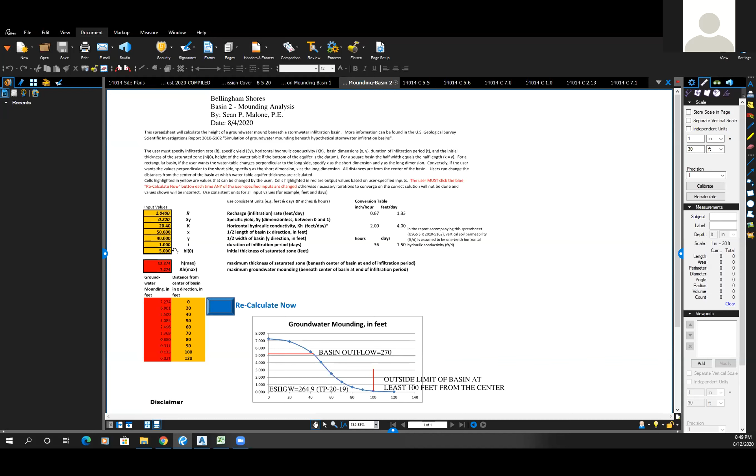And then the T, the time, is the duration of the infiltration. And we had 1 day infiltration rate here, and that's based on the infiltration rate times the depth of the water, the 2 feet of water that we were talking about. And then the saturated thickness is your separation between your estimated seasonal high groundwater and your depth to bedrock. So that's how much room there is for kind of fluctuation and flow within that aquifer. So what this shows is the depth of the mound above your groundwater, and that's what the vertical scale is.

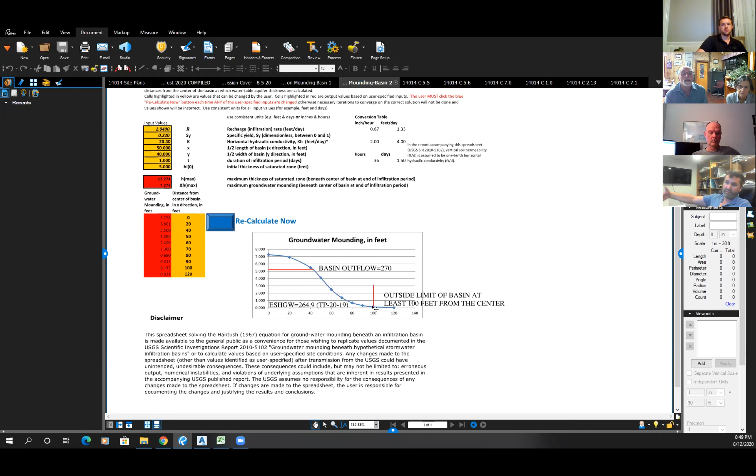So this is your depth in feet of the groundwater rise. This is your mound, and then this is the distance from the center of the basin. So what we're showing here for basin 2, once you get 100 feet, you're back down to normal groundwater elevation, and that 100 feet is within the outside footprint of the basin. It doesn't extend beyond the property or affect abutting properties. Does that help?

Yeah, I mean, have you ever seen the calculation that I'm talking about with the standard, like bell curve? I have it, well, only in the sense of a hydrograph from a stormwater analysis, where you have the peak of a storm and then you come back down. That's a stormwater analysis. This is specific just to the groundwater. If there is more of a bell curve for a mounding analysis, I actually haven't seen it. And if somebody wants to point me to it, I'd be glad to use another analysis. No, that's why we're going to ask our peer review to take a look at this.

Yeah. Okay. So what you're looking at here is that the 5 foot value, the HI, the thickness of the saturation zone, is achieved 40 feet from the center of the storm in a one-day storm. Is that? Yeah. So a typical storm event, model-wise, is a 24-hour duration. So that's kind of where the one-day thing comes from.

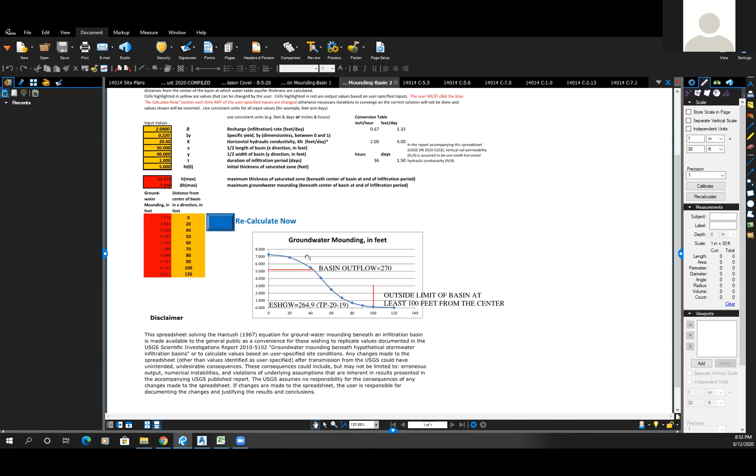And that's why, under the state standards, I think it can be arguable whether or not a mounding analysis is required for this basin, because it doesn't retain the whole 10-year storm. You have outflow from it, and that's kind of the standard in the stormwater standards. But all that aside, we did it, and I think we're still showing that we can handle this flow and won't be causing any problems. And so with the reconfiguration of the basin, I believe the previous design was holding 3 feet of water. Is that correct? Basin one was holding, I think it was 2.5 feet. So we've decreased the amount that we are withholding there.

Okay, and I noticed that you have cores to the berms around the basin now. If you would show that to the commission, there you go. Yeah, so we've also added the clay core that we talked about. I think it was a recommendation from Frank at BSC at one of our hearings. So we've added a clay core in the center to prevent any kind of seepage and long-term degradation of the berm from that seepage.

We've also dispersed the outlets. In talking to Mark, I believe this was something that may have been discussed in the field, or I'm not sure if we talked about it ourselves, but we have 3 or 4 separate outlets here. So we're not concentrating one big flow from the basin, and these are all separated by about 50 feet too, to disperse the flow going into this naturalized area before it gets down into the buffer and into the wetlands and stream. Okay.

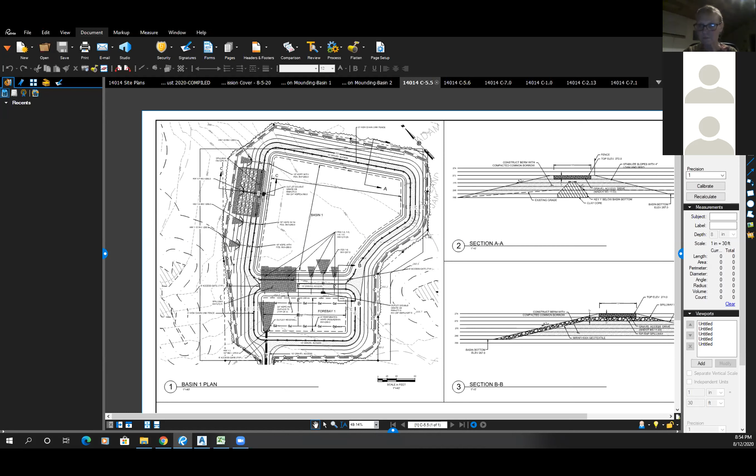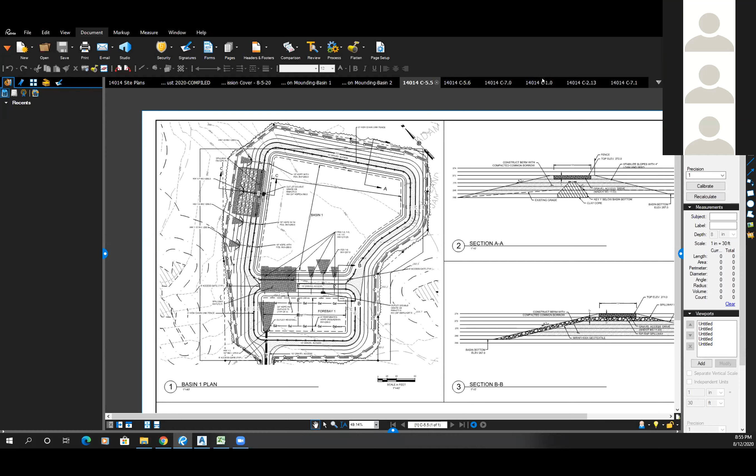I will comment that the applicant has done a lot to address the concerns that we brought up at our last hearing. Now, I haven't done a complete and thorough review, and I know that our peer reviewer, Frank, has been unable to do that. But I appreciate the work that you're doing. I have one more question, and it relates to the disposition of the open space. It's actually a comment and a question. There is an area of open space that I don't think the commission is going to be interested in accepting, and that's the area that's associated with the drainage for Lakeview Estates.

That area has velocity mitigation structures on it. It has a large detention basin, and a sewer line was relocated without a permit. And so there's a restoration area there. A lot of things going on there that I don't think we would be interested in for open space.

But the second comment is, I know that our administrator's been working diligently on several projects with conservation restrictions. Especially, she's been working with Dan Wells, who's got a pretty good handle on the whole process. One of the things that the commission needs to determine, and I mentioned that at our last meeting, is it's a simplified process. We don't need to go to town meeting. We can accept the land, vote to accept the land, have the selectmen sign off on it. It's not an unwieldy process at all.

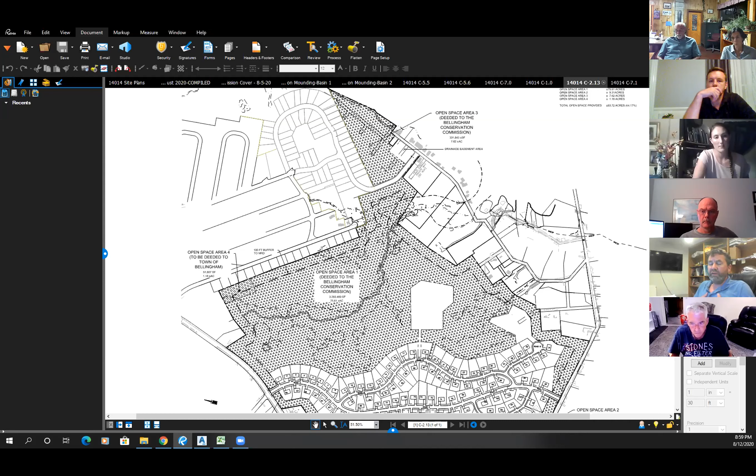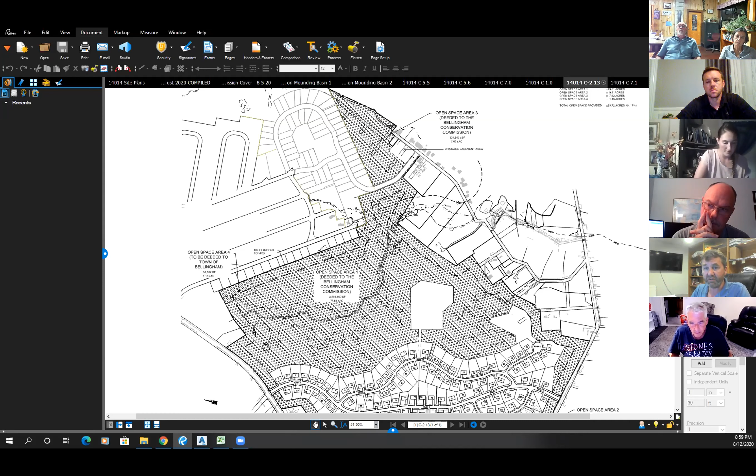Yeah. Just one thing, Mr. Chair. So, where we think we are, I think we've heard all the commission's thoughts and comments. We've responded to them. We understand we're waiting for BSC for their engineering review, and know that you can't act until you get confirmation from them. But assuming everything is good on that, we want to just be sure that there's no other issues or questions from this commission, with the hope that once BSC comes back with an okay, we can wrap this up and issue an order. I think that's the goal.

That's absolutely the goal. I will say that I know the planning board had a couple of cuts at this. I know that our peer reviewer had taken some looks at it, but once we commenced our review, I think we came up with some things that maybe had not been anticipated by the design team or by the peer reviewer, and you have addressed the concerns. So I just wanted to mention that, and Sean, you already know this, and Jim's participating this evening, that we do work closely with the planning board through this process.

They got a little bit ahead of us on this one, but as we're getting to the final comments, I think, once the planning board feels like they're comfortable, we can open up dialogue with them and figure out what the end point is going to be in this hearing process. We do anticipate it's going to be soon, because you have answered a lot of our questions. But again, we want to make sure that the planning board is on the same page with us, so that we don't close a hearing and have some changes made with their continuing process. We need to have the same plan set.

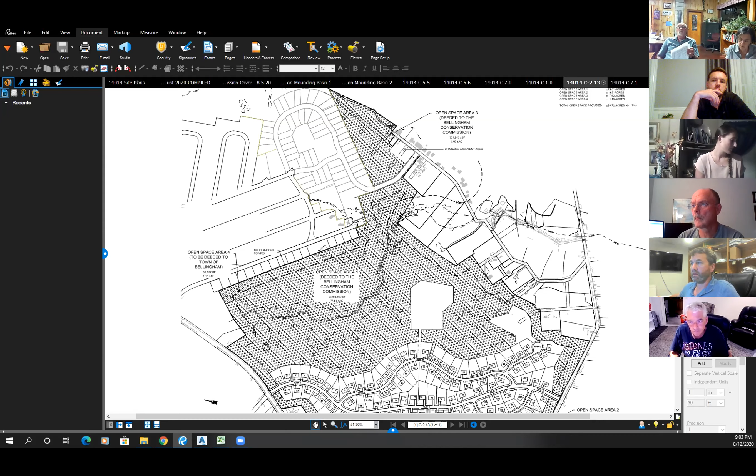So do I have a motion? So moved. Second. Okay. I have a motion and second. Discussion? All in favor? Aye. Aye.

I think somebody's cat needs to go out. I think that's Mike, actually. Mike needs to go out. All right. Mike, let yourself out, will you? All right, again.

All in favor? Aye. Aye. Okay. Aye. All right. Brian? Okay. Well, okay, opposed? All right, I'm going to say that Mike is in favor. So that's a unanimous vote.

And so thank you. We can't hear you, Mike. That was awesome. What's wrong with him? Yeah, Mike, I keep muting you because you're not coming through well. He's got to stop eating helium. All right, thank you very much. Okay, we'll see you on the 9th. Thank you. You got it. Okay, we have another hearing. You hanging in there, Cliff? No air conditioning, it's hot. All right. It's all good.

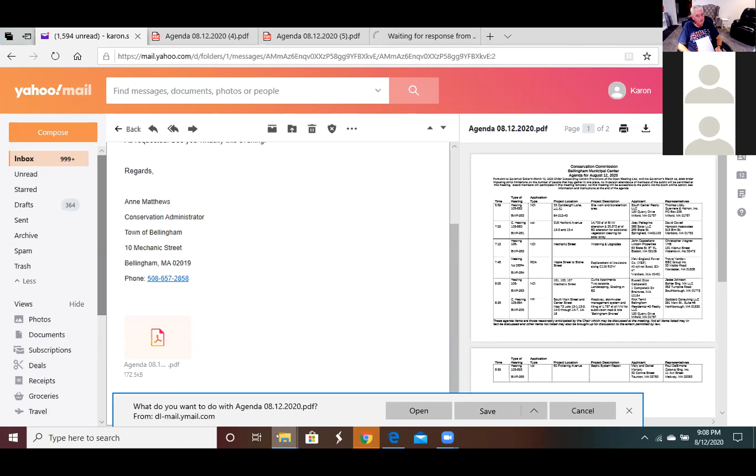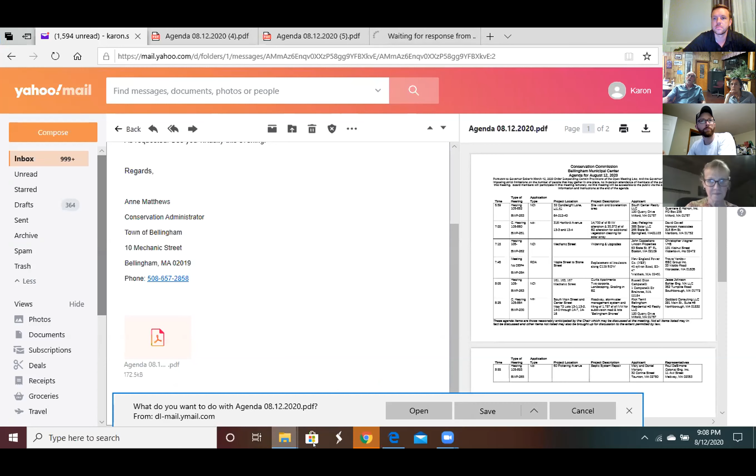Oops, that wasn't right. That's the agenda. Okay, let me try this again. Take your time. We've been doing it all night. I apologize. My first time. Hey, Paul, I'm here. I got it. So you're muted. Unmute yourself. Can you tell me how to unmute from the phone? All right, let me call you back, Paul. Sorry, that was Paul DeSimone, the engineer on the line. Yep, it looks like he's on. He's having trouble unmuting himself. I can't seem to get the plan up. I apologize.

Oh, that's okay. All right, well, the plan was sent out to our commission members. Everyone had an opportunity to look at it, but sometimes when doing the review, it's helpful for everybody to see it. So just to run it down, applicant's representative said that they have really nowhere else to put this. She really wasn't kidding. It's a very tight spot. Shows 2 existing cesspools. So the soils are going to be removed. New trench put in, new chamber, tank, you know.

So there was one area right at the front of Pickering. This particular house is at the corner of Pleasant and Pickering, and the wetland line does go down towards Pickering. So we did find that there was some trash and debris, wood boxes. It looks like some pretty recent stuff, too, that was just dumped down in the wetland.

It looked like it was probably in the 25-foot no disturb, or maybe even in the resource area. It's pretty close. Yeah, near wetland flag number 8, 9. So we'll include that for cleanup in the order, just so that you know. If you want to make that a condition, we'd be happy to do that.